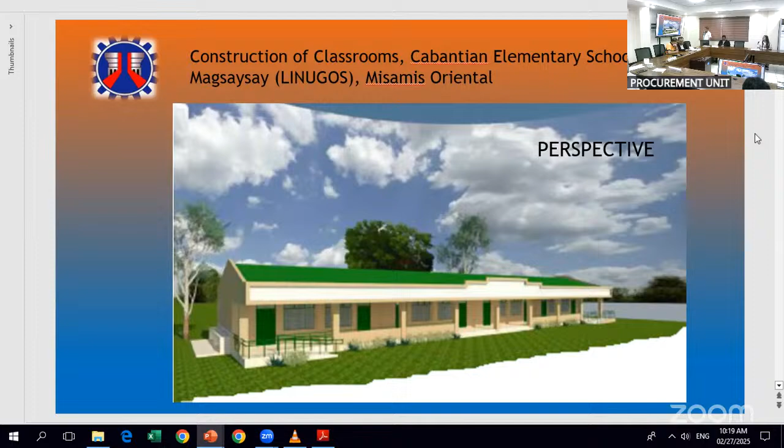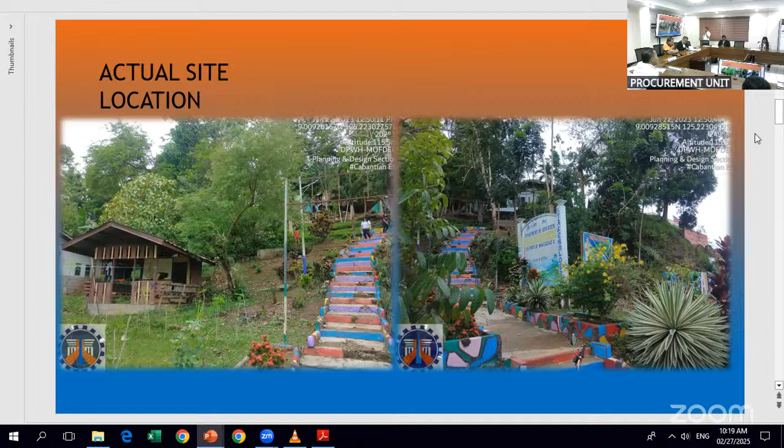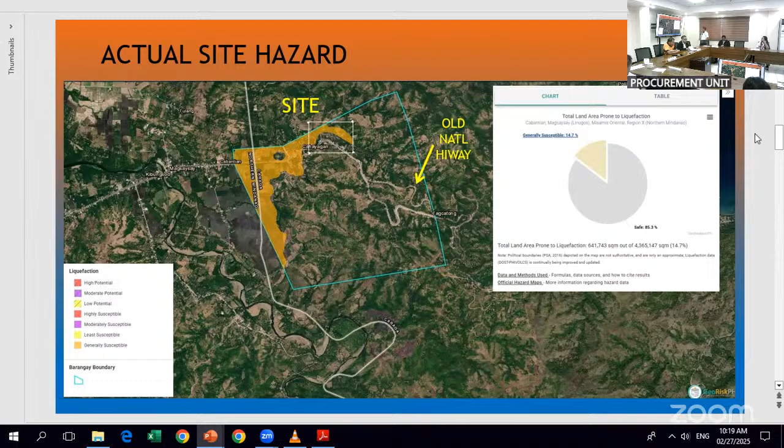So this is our perspective. Our location vicinity is around 57.6 kilometers from our office. This is the actual site location. We want to let everybody know about our site hazard, which is a liquefaction area. As you can see, the yellow on another side is another area. Also for this hazard, we have rain-induced landslide, moderate susceptibility, possible landslide occurrence.

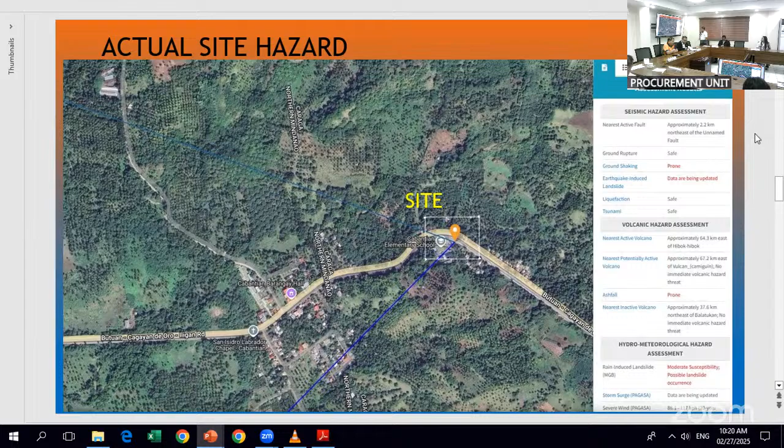Okay, next. This is still the same. So program of works: construction of classrooms with reinforced concrete footing and columns, concrete flooring, masonry works, stainless steel railings, corrugated roofing with steel trusses, rafters, and girts, painting on masonry works, painting on steel works, PWD ramp, concrete pathwalk, windows, tile toilets, sanitary works, plumbing, water lines and sewer line, septic vault, electrical works, signage, slope protection, concrete canal and steps.

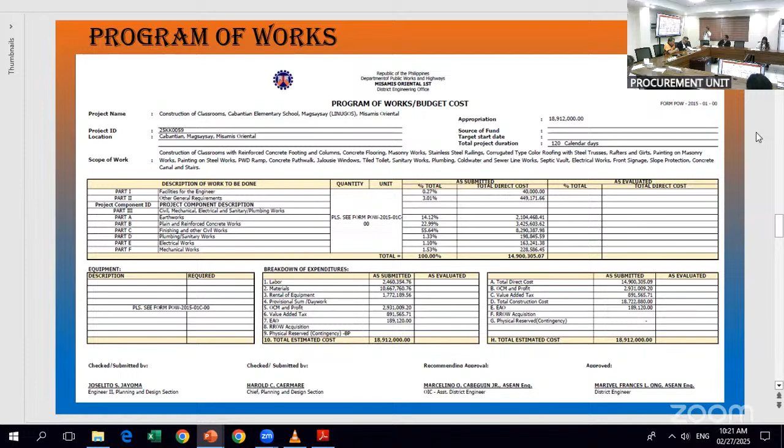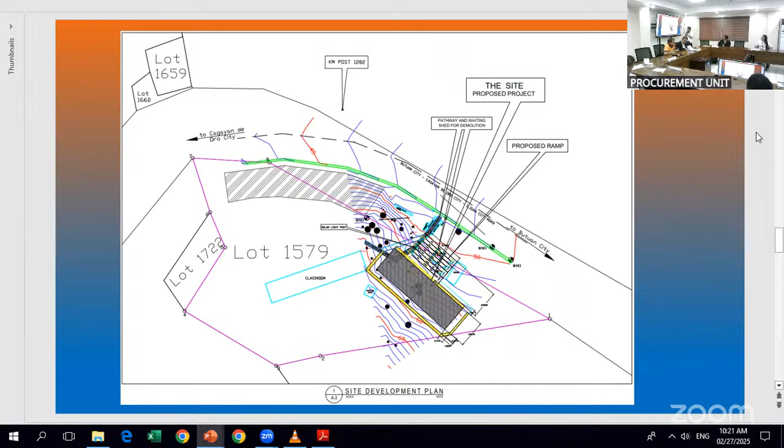So our appropriation is 18,912,000. Total duration is 120 calendar days. So this is our site development plan. On the highway, we have to make this ramp as a DPWH requirement. So this is on the side, and at the same time the ramp.

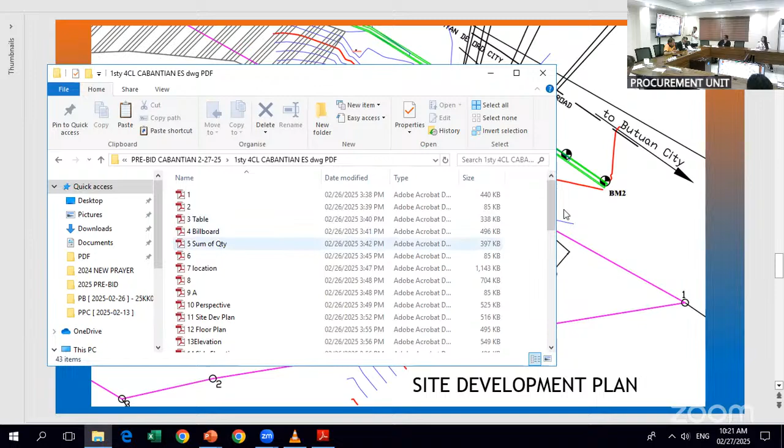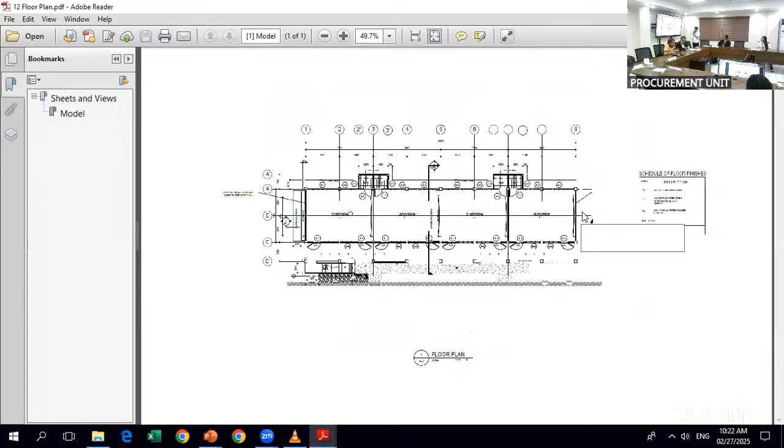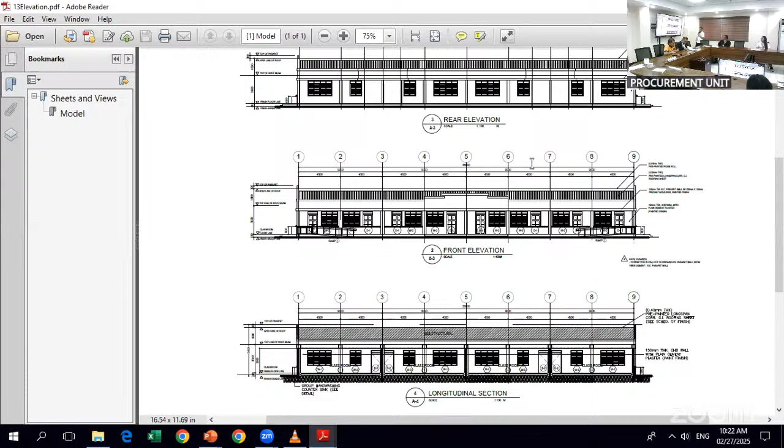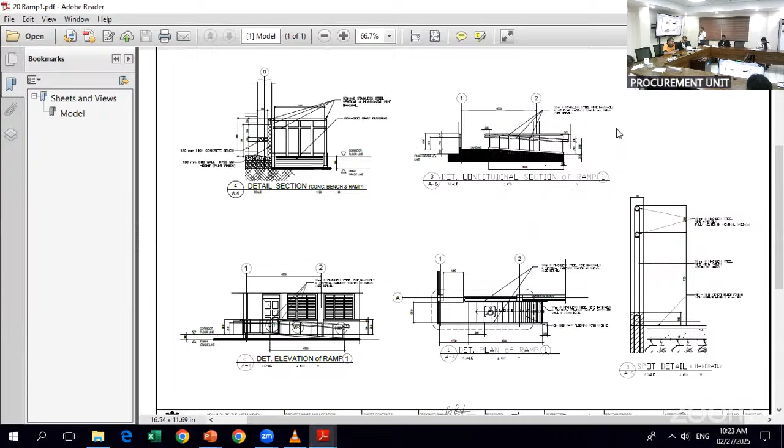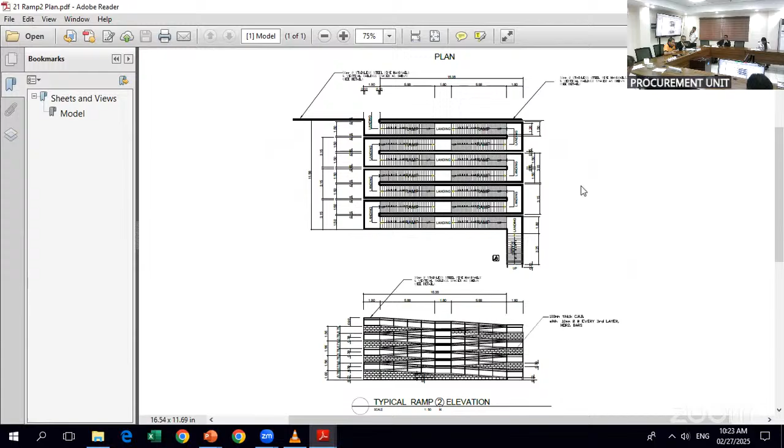Here is ramp 1. We have a standard from the original plan. So this is our ramp 1, on both sides of the building. Next. So again, this is additional work as emphasized earlier, ramp 2. It's quite high from the highway. So to maintain the 1:15 slope, basically 1, 2, 3, 4, 5, 6, 7. Seven of them.

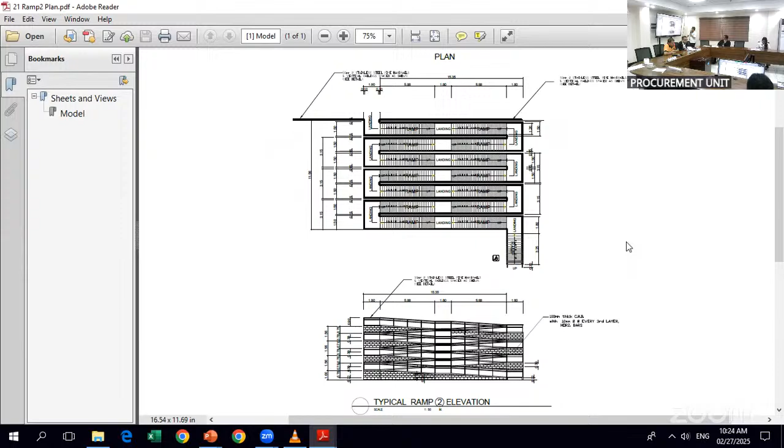So this will be our side elevation section of the ramp. 1:15, so it's quite high. Basically, we use hollow blocks with wall footing, and then on its side. Here it is, on the side. Okay, next.

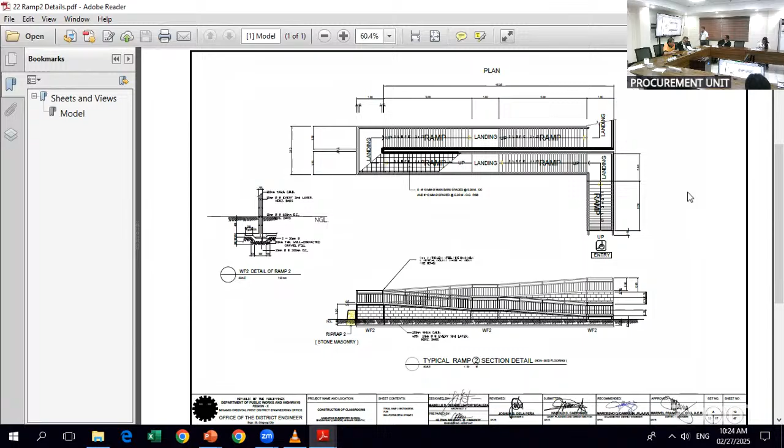So again, on its side we have a regular stair. The one in the original plan is stair 1, so we call this stairs 2. It's in the plan. The total is around 35 steps from the highway. 200 by 300 for the rise and run, so it's just right.

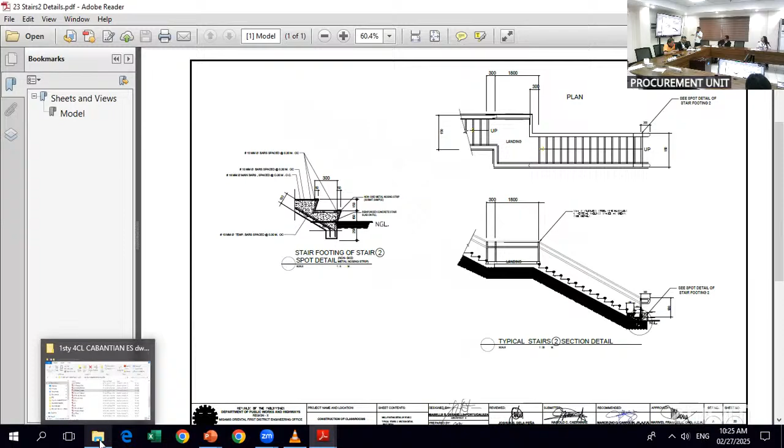So for the whole area, this will be our cross section. We can see here the cutting on the side. Around the building, we established stone masonry or slope protection to protect the building, against landslide and at the same time for the fill area. The ramp on the side is new.

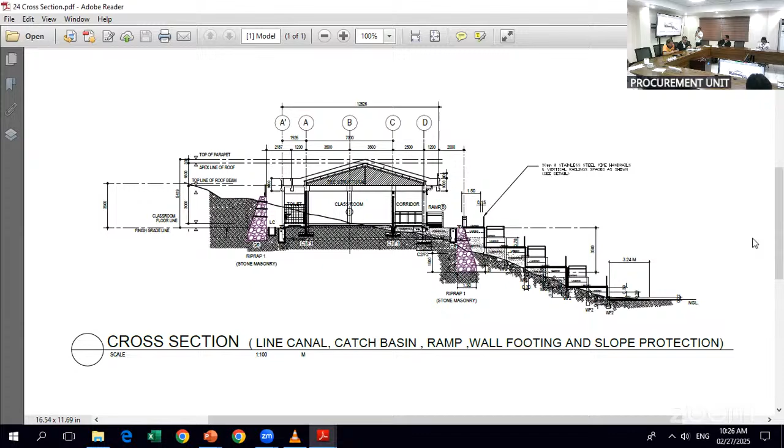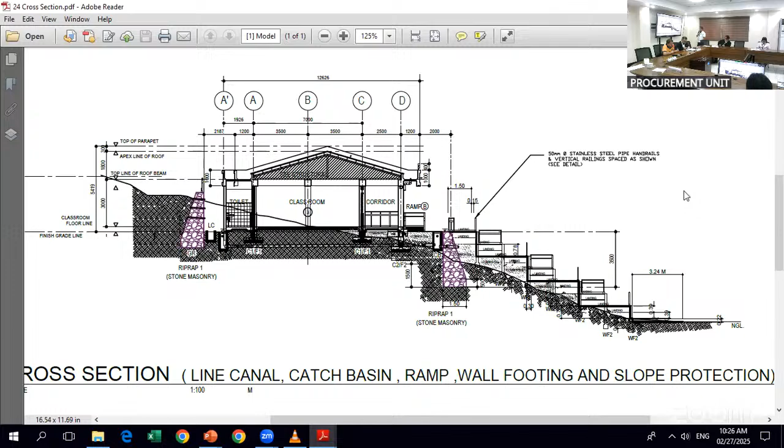So again, we have a lined canal here. This is our lined canal for the gutter runoff. It runs all along to the National Highway, where the water drains out. Okay. So these are our standard details for the stone masonry. We establish weep holes.

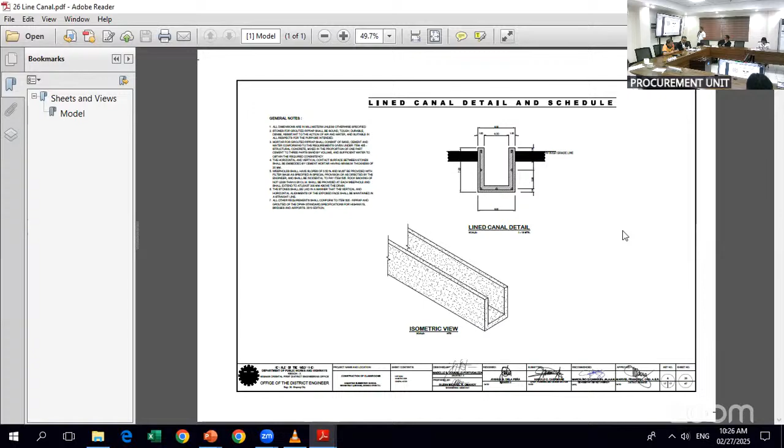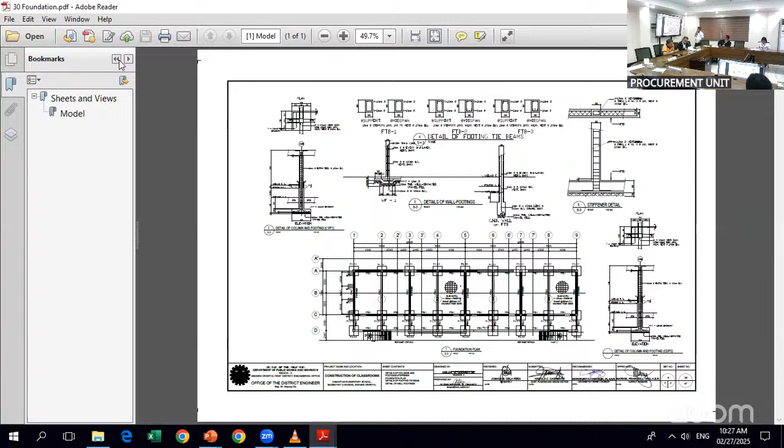So we have also the lined canal. So this is the lined canal around the building and then it goes to the National Highway. Foundation. Okay.

You have blackboard, tank signage, septic tank, electrical works. And we also provided the electrical posts and fire alarm system. Lastly, we have the demolition of existing waiting shed. So that's all. Okay, thank you, Engineer Silito, for the presentation. So, any questions from the BAC members?

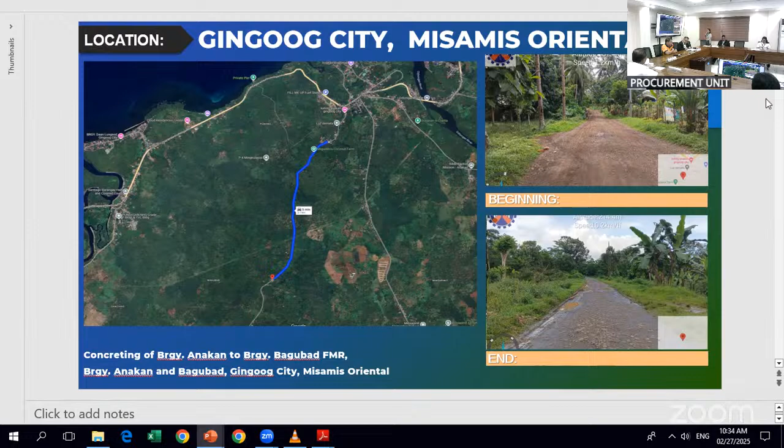So, scope of work, we have concreting of road with carriageway 5 meters width with 0.2 meters thickness. Paved shoulder, 1 meter width with 0.15 meters thickness. We have also construction of retaining wall with wheel guard, rehabilitation of existing PCCP that is 80 meters in length with 0.2 meters thickness. We have also installation of 1 barrel RCPC and we have relocation of electrical poles.

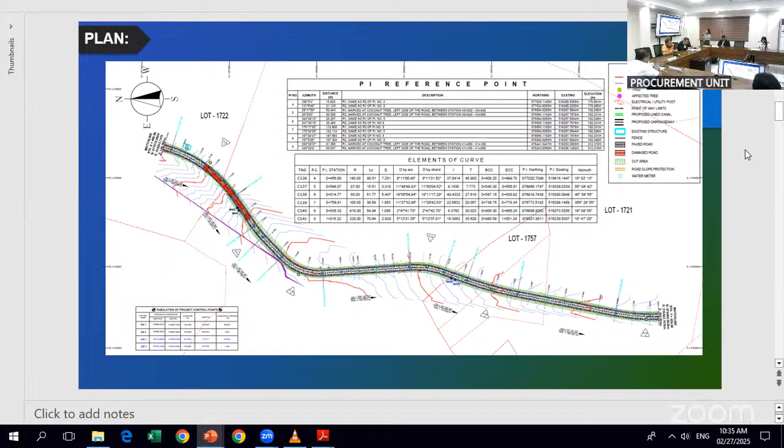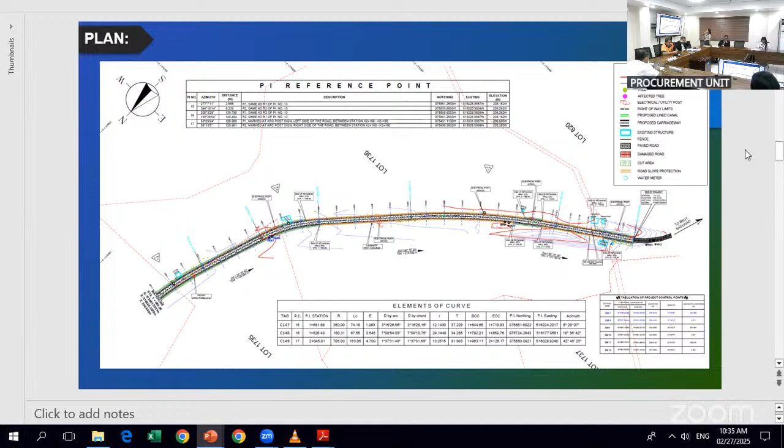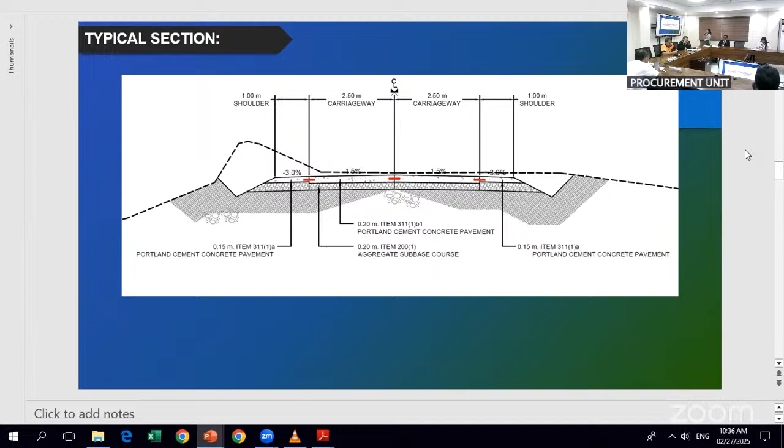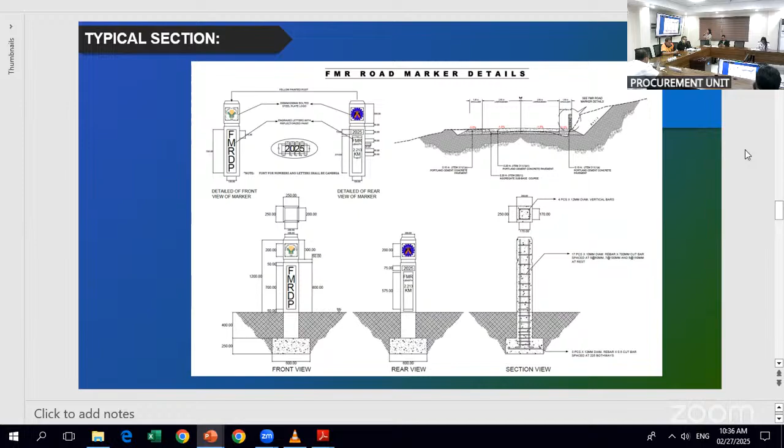Next. So these are the summary of quantities, items included in the project. We have provision of field office for the engineer, project billboard and signboard. We have occupational safety and health program, traffic management, mobilization and demobilization. We have removal and relocation of utilities for our removal and relocation of electrical posts. We have individual removal of trees, removal of actual structures and obstruction for the removal of existing PCCP.

We have surplus common excavation, pipe culvert and drain excavation, embankment from roadways, structure excavation, common soil. We have subgrade preparation, common material, aggregate sub-base course. We have Portland cement concrete pavement, 0.15 thickness, 14 days for our paved shoulder. Portland cement concrete pavement, 0.2 meters thickness for our carriageway. We have reinforcing steel, grade 40, structural concrete, pipe culvert, 910 mm diameter, stone masonry. That would be all.

Thank you, Engineer Sharon. Any questions from the BAC members? None. So from YouTube live viewers? None. So we will proceed for the next project.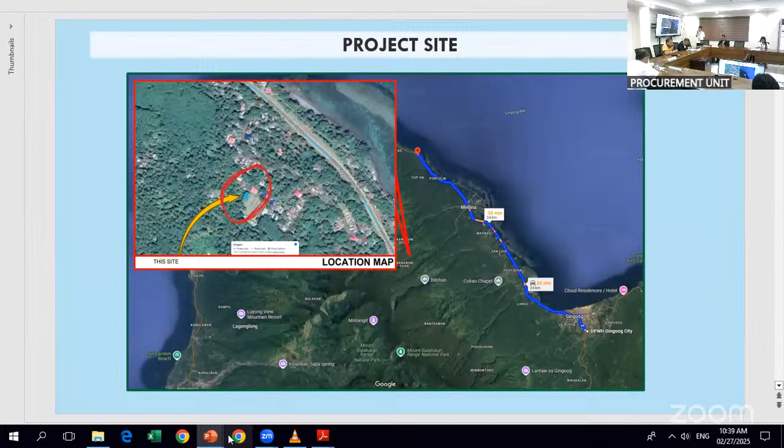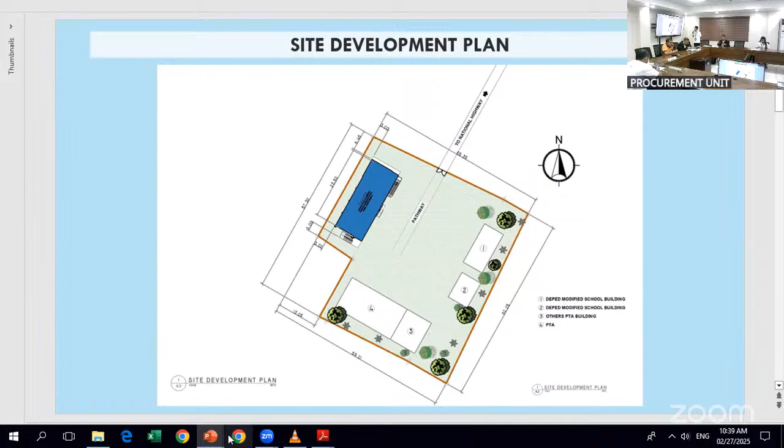For the project scope, the school building includes demolition of existing handwashing area, removal of nine 501 to 750 mm diameter trees, complete structural components, reinforced concrete footing, columns and beams, complete roof trusses and roof sheets, including all roofing accessories, ridge roll, downspout and flashings, complete ceiling with reflective insulation, complete concrete gutter with cement-based liquid and membrane waterproofing,

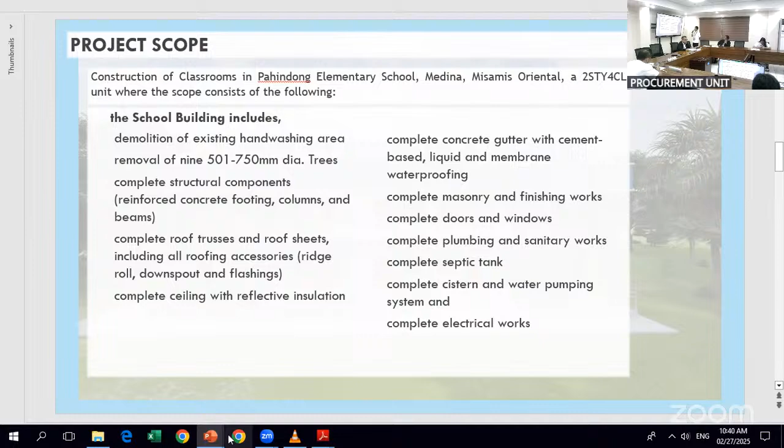complete masonry and finishing works, complete doors and windows, plumbing and sanitary works, septic tank, cistern, water pumping system, and electrical works. Next please. And for summary of quantities, provision of field office for the engineer, rental basis, permits and clearances, project billboard and signboard, occupational safety and health, mobilization and demobilization, general scaffolding and shoring and netting, signages, clearing and grubbing, individual removal of trees, 501 to 750 mm diameter, removal of structure and obstruction, structure excavations, common soil, embankment from

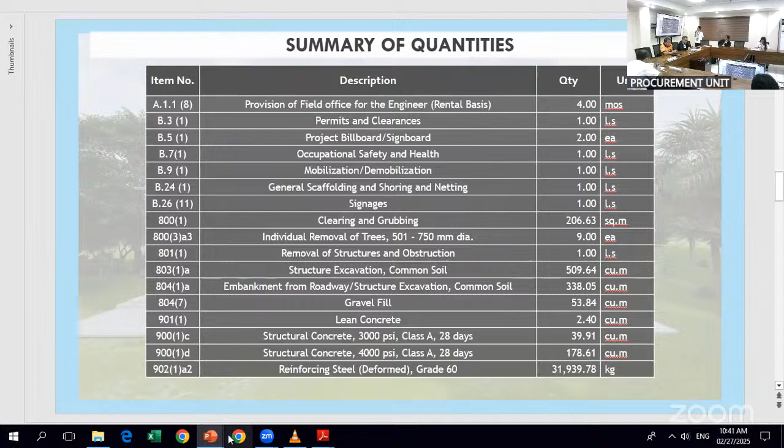roadway structure excavation, common soil, gravel fill, lean concrete, structural concrete, 3,000 PSI class A 28 days, structural concrete 4,000 PSI class A 28 days, reinforcing steel deformed grade 60, reinforcing steel deformed grade 40, formworks and false works, soil poisoning, CHB non-load bearing, including reinforcing steel 100 mm and 150 mm. Doors, flush, wood panel, frames, jambs, sills, head, transoms and mullions. Windows, glass, aluminum glass windows, awning type.

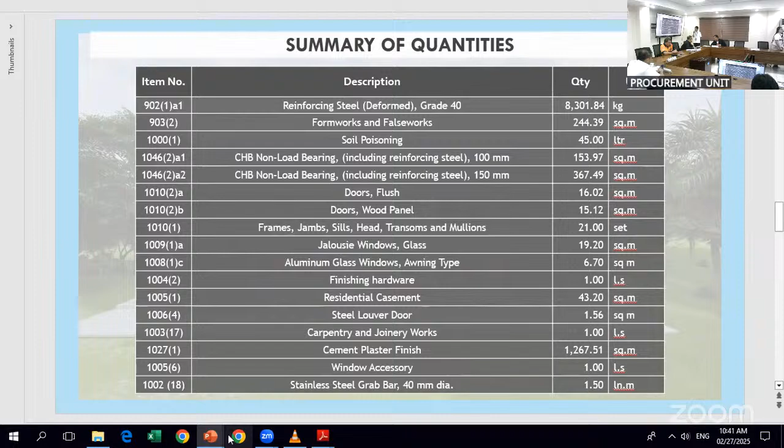Finishing hardware, residential casement, steel louver door, carpentry and joinery works. Cement plaster finish, window accessory, stainless steel grab bar, 40 mm diameter. Molding concrete, ceiling 4.5 mm metal frame, fiber cement board, reflective insulation, glazed tiles and trims, unglazed tiles, textured unglazed tiles, waterproofing, cement-base, waterproofing liquid, built up and preformed membrane, railing, concrete railing, standard, and parapet, stainless steel railing, painting works, masonry or concrete, painting works wood and steel. Pre-painted metal sheets above 0.427 mm corrugated long span. Next, please.

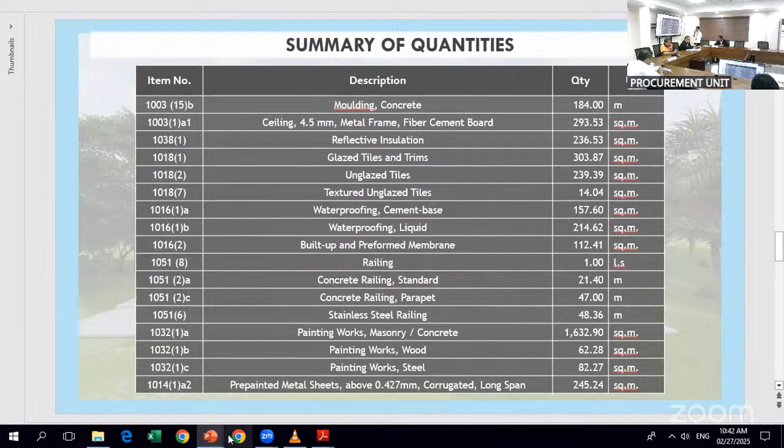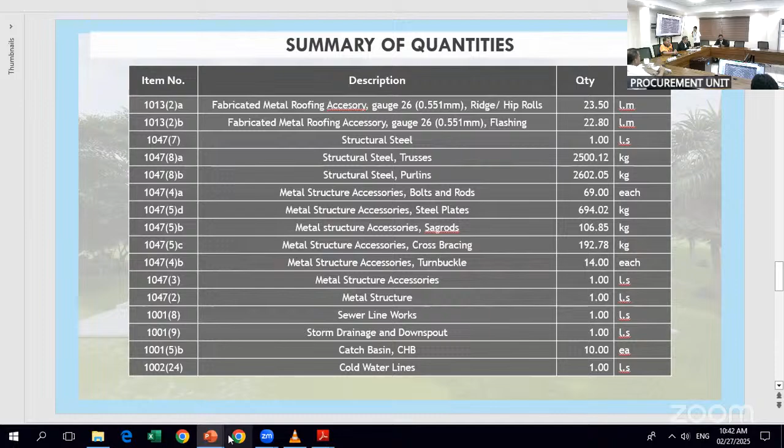Fabricated metal roofing accessory, gauge 26, 0.551 mm, ridge roll. Fabricated metal roofing accessory, gauge 26, flashing, structural steel, purlins, metal structure accessories, bolts and rods, steel plates, sag rods, cross bracing, turnbuckle, metal structure accessories, metal structures, sewer line works, storm drainage and downspout, catch basin, CHB, cold water lines, plumbing fixtures, septic vault, cistern, conduits, boxes and fittings, wire and wiring devices, panel board with main and branch breaker, lighting fixtures and lamps, water pumping system, and fire alarm system.

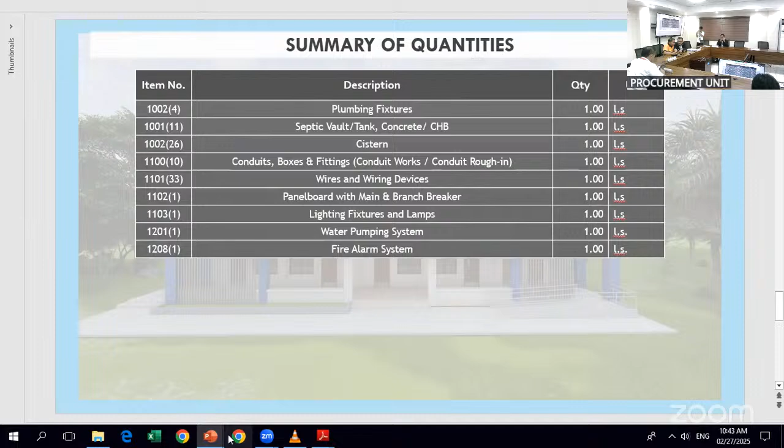Any question? Thank you, Engineer Clark. Any questions from the members? So from YouTube live viewers, and so we'll proceed for the next project.

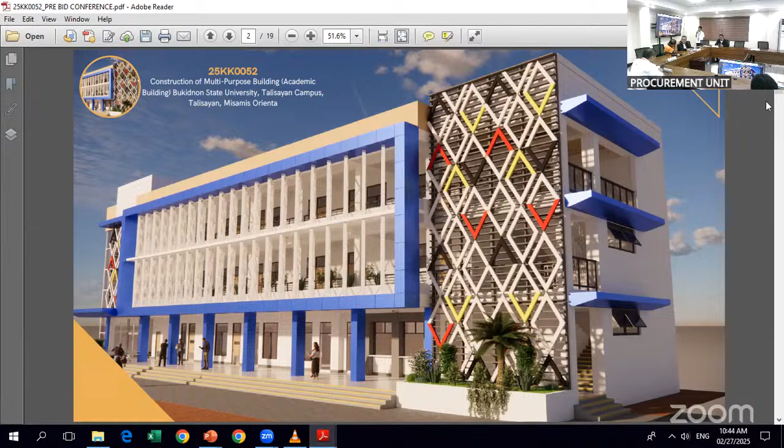So next, I'll now present another project. The project ID 25KK0052, construction of multi-purpose building, academic building, Bukidnon State University, Talisayan campus, Talisayan, Misamis Oriental. This is our perspective. Next, please. And as you can see, this is our corridor. Next, please. This is the project site. It is behind the existing building. Okay. Next, please.

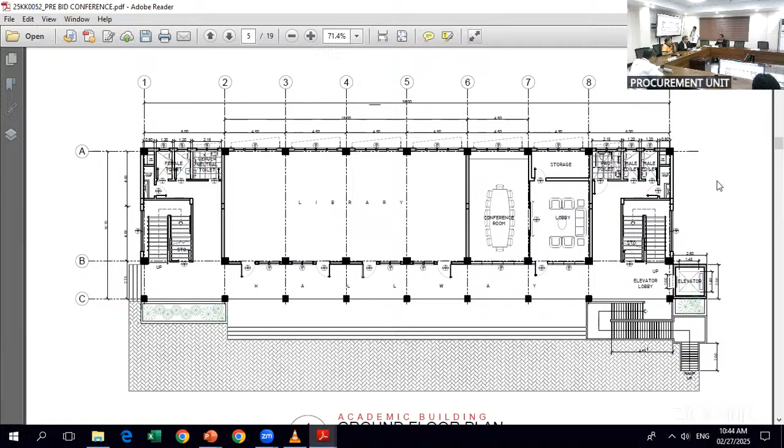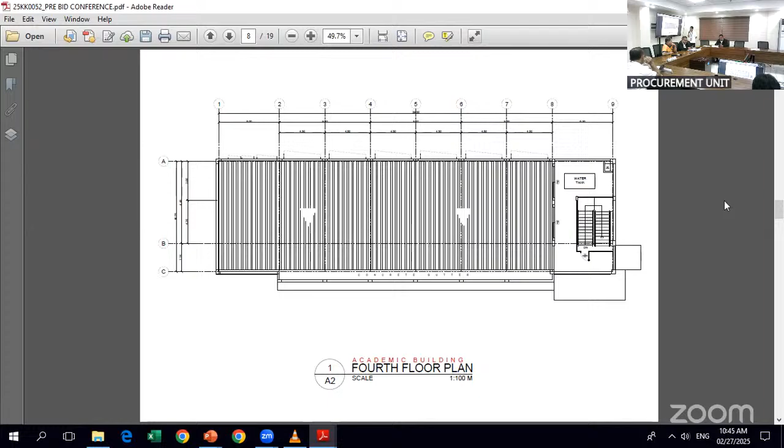This is our ground floor plan. We have a library which occupies 2 classrooms, then conference room, as well as storage and lobby. Next, please. And this is the second floor plan. We have here 3 classrooms. Next, please. And then our third floor plan, we have 2 classrooms and 1 science laboratory. And the fourth floor plan. Next, please. So this is the front elevation.

Our rear elevation. And the right side and left side elevation. For the project details, appropriation 50 million, ABC 49,500,000, and duration of 280 calendar days.

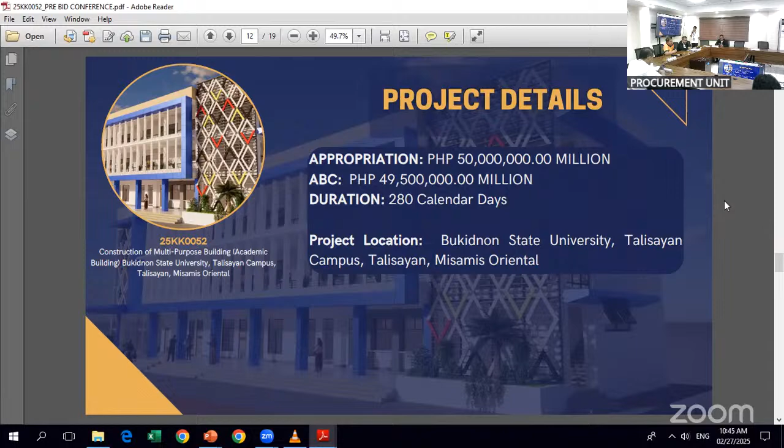Construction of three-story school building with 5 classrooms, 1 science laboratory, and a library. The scope includes the following: earthworks, including excavation, complete structural components, footings, columns, beams, on-grade and suspended slabs, and steel frames for the provision of elevator, complete CHB, interior and exterior partitions with plaster and painted finish,

complete windows and doors, including accessories, floor finish to tile, glazed, and unglazed, and epoxy coated finish, complete roofing works. Complete plumbing works, including septic vault, cistern, plumbing fixtures and piping for sewer, drainage and downspout and cold water lines, complete mechanical works, including fire alarm system, ventilating system, water pumping system, automatic fire sprinkler system, and the provision of electric elevator. And electrical works, excluding generator set.

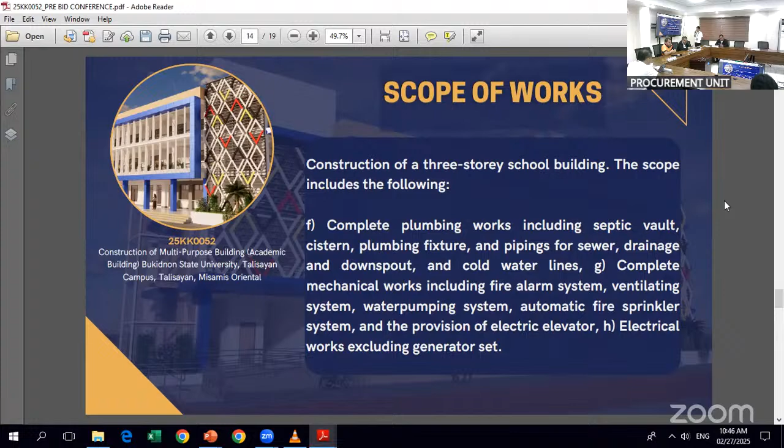and grade 60, structural steel, furnished, grade 36, structural steel, erected, grade 36, formworks and falseworks, soil poisoning, CHB non-load bearing, including reinforcing steel 150 and 100, painting works, masonry, concrete, wood, steel, then glazed tiles and trims, and unglazed tiles, textured and glazed tiles, stainless steel grab bar, ceiling, metal frame, fiber cement board, ceiling, metal frame, gypsum board, wall, metal frame, fiber cement board, finishing hardware, aluminum glass windows, sliding type, awning type, and fixed type, jalousie

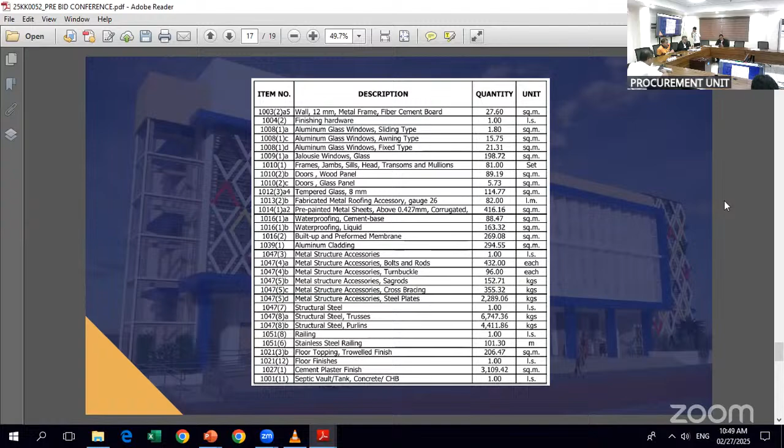windows, glass frame, jamb sills, head transoms, and mullions, doors, wood panel, and glass panel, tempered glass, fabricated metal roofing accessory, gauge 26, pre-painted metal sheets, corrugated, and then waterproofing cement base, waterproofing liquid, built up and preformed membrane, aluminum cladding, metal structure accessories, bolts and rods, turnbuckle, sag rods, cross bracing, and steel plates, structural steel trusses and purlins, railings, stainless steel railing, floor topping, floor finishes, cement plaster finish, septic vault tank, concrete,

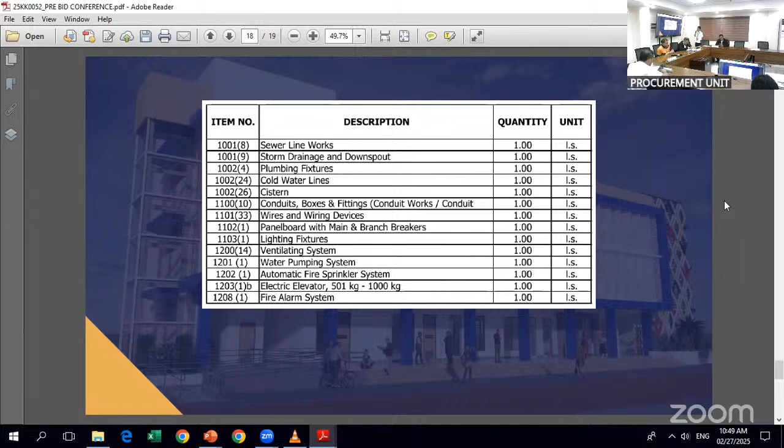sewer line works, storm drainage and downspout, plumbing fixtures, cold water lines, cistern, conduits, boxes and fittings, wires and wiring devices, panel board with main and branch breakers, lighting fixtures, ventilating system, water pumping system, automatic fire sprinkler system, electric elevator, 501 kilogram to 1,000 kilogram. Then lastly is the fire alarm system. That's all. Thank you.

Okay, so do you have questions from the board members? None, so YouTube live viewers, none, so we'll proceed for the next project. Thank you, Engineer Clark.

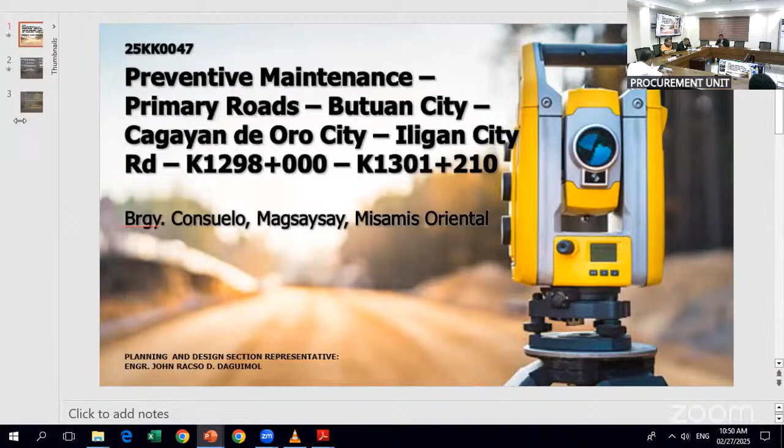Hello, good morning, everyone. So last project, 25KK0047, preventive maintenance, primary road, Butuan City-Cagayan de Oro City-Iligan City Road, kilometer 1298+000 to kilometer 1301+210. With the budget for the contract, 144,750,000, with a length of 3,217 linear meters, contract duration of 175 calendar days. Location is Magsaysay, Misamis Oriental.

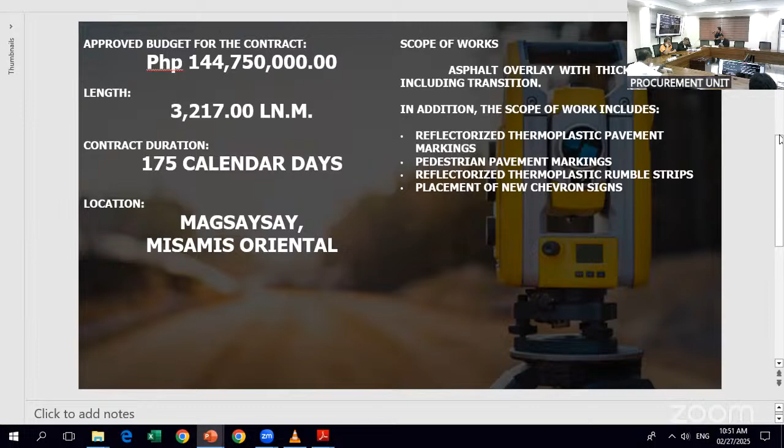For the scope of works, asphalt overlay with thickness of 50 mm, including transition. In addition, the scope of works includes reflectorized thermoplastic pavement markings, pedestrian pavement markings, reflectorized thermoplastic rumble strips, and placement of new chevron signs. So it is provision of field office for the engineer, 5.83 months. Billboard is 2 each. Occupational safety and health, 1 lump sum. Traffic management, 1 lump sum. Mobilization, demobilization, 1 lump sum.

Emulsified asphalt, 46,660.50 square meters. Bituminous concrete surface wearing course, hot plant, 50 mm, 46,660.5 square meters. Regulatory signs for pedestrian crossing, 6 each. Regulatory signs for school children crossing, 4 each. Warning signs for slow down, 3 each. Traffic instruction signs, reduce speed, 3 each. Hazard markers or chevron sign, 24 each.

Reflectorized thermoplastic pavement markings white, 1,085.13 square meters. Concrete joint sealant, hot-poured elastic type, 6,807.83 kilograms. And reflectorized thermoplastic rumble strips, 60 square meters. Okay, so thank you, Engineer John Racso. So do we have questions from board members? None from the YouTube live viewers.

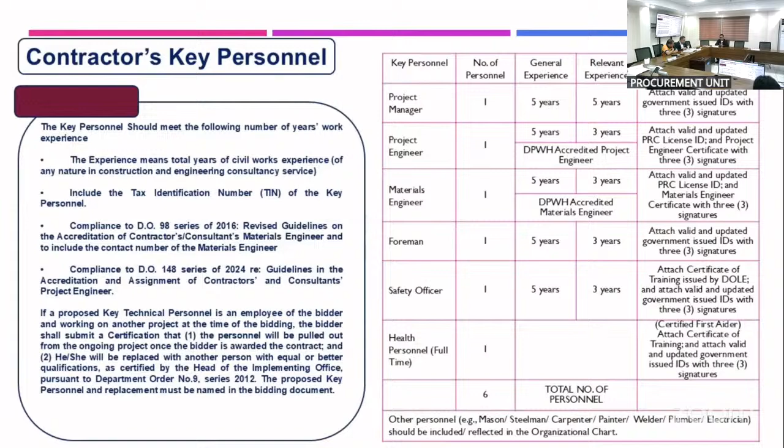Another personnel is one safety officer with 5 years of general experience and 3 years of relevant experience, with a certificate of training and a valid and updated government ID with relevant experience. The last is one full-time health personnel, with the certificate of training and a valid and updated government ID, of 3 years. All in all, there should be 6 total, with other personnel such as the mason, steelman, carpenter, painter, welder, plumber, or electrician to be included or reflected in the organizational chart.

Contractor's minimum equipment requirements. The contractor is required to provide proofs of ownership and other supporting documents for equipment owned, lease agreements for equipment, and or purchase agreements supported by a certificate of availability from the equipment lessor or vendor for the duration of the project. Proofs of ownership and other supporting documents must specify and indicate the model, owner, capacity, performance, or size, plate number, car number, or body number, chassis serial number, engine serial number, specification and condition.

Contractor's minimum materials testing: please refer to DO number 11, series of 2017 for minimum materials testing. This requires the submission of the materials testing equipment as stated in clause 5.6, 2.8, and 4.c. Project requirements using form DPWH INFR 15, list of contractor's major construction equipment, to be assigned to the contract, supported by certificates of availability.

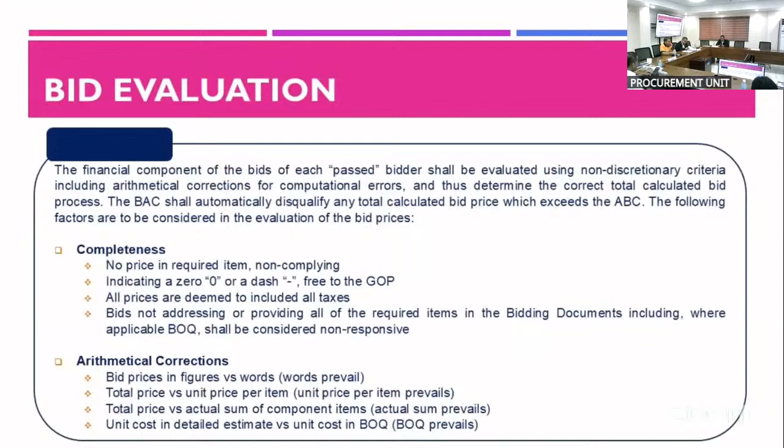BOQ prevails. Post qualification. Verification of legal requirements: licenses, certificates, permits, non-inclusion in blacklist. Verification of technical requirements: key personnel, where minimum work experience requirements should be satisfied. Availability and commitment of major construction equipment and materials for laboratory equipment. Performance in ongoing government and private contracts.

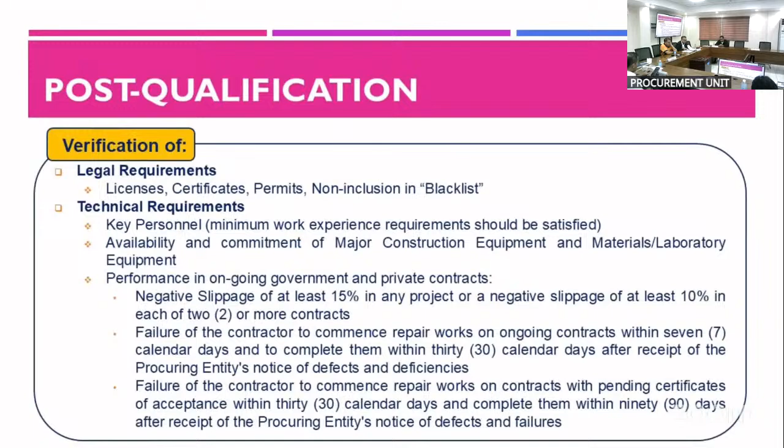Negative slippage of at least 15% in any project, or a negative slippage of at least 10% in each of 2 or more contracts. Failure to commence repair works on ongoing contracts within 7 calendar days and to complete them within 30 calendar days after receipt of the procuring entity's notice of defects and deficiencies. Failure of the contractor to commence repair works on contracts with pending certificates of acceptance within 30 calendar days and complete them within 90 days after receipt of the procuring entity's notice of defects and failures.

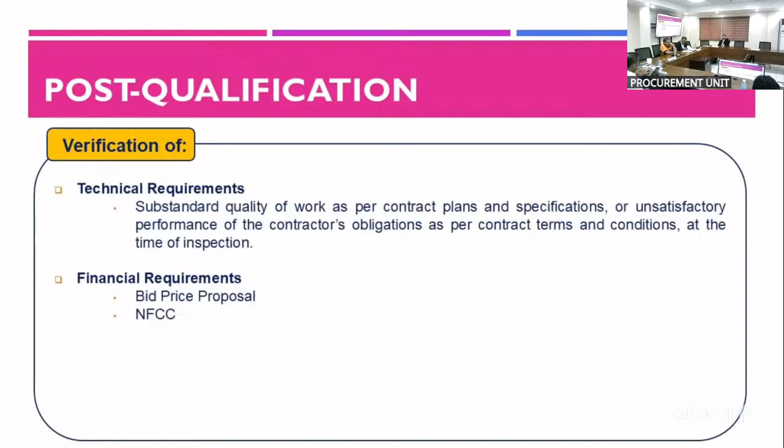Verification of technical requirements: substandard quality of work as per contract plans and specifications, or unsatisfactory performance of contractors' obligations as per contract terms and conditions at the time of inspection. Verification of financial requirements: bid price proposal and NFCC.

Contract award. The contract shall be awarded to the bidder whose bid has been determined to be the lowest calculated and responsive bid, or LCRB, as a result of the detailed evaluation and post-qualification conducted. The successful bidder shall be notified through the issuance of notice of award within the bid validity period and must be confirmed by the successful bidder in writing within 10 days upon receipt thereof, in accordance with section 37.2.2 of the 2016 revised IRR of RA 9184.

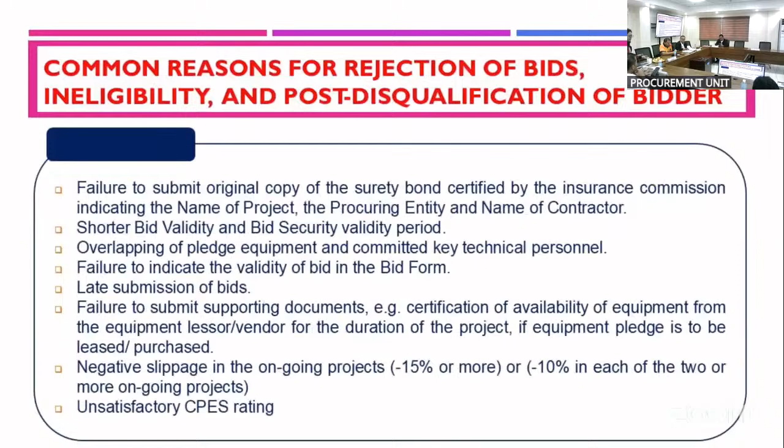6. Failure to submit supporting documents, such as the certification of availability of equipment with the equipment lessor or vendor for the duration of the contract, if equipment pledged is leased. 7. Negative slippage in the ongoing projects, negative 15% or more, or negative 10% in each of 2 or more ongoing projects. 8. Unsatisfactory CPES rating. 9. Incomplete pages of bid documents. 10. Authority of the signatory to sign on behalf of the bidder.

Single proprietor: signatory should be the owner or proprietor only. Corporation or cooperative: board secretary certificate and board resolution. Joint venture: resolution and agreement. Partnership: as indicated in the articles of the partnership. That is all.

Strike policy for contracts for infrastructure works, goods, and consulting services as per Department Order number 17 series of 2015. Section 69.1. In addition to the provisions of rules 21 and 22 of this IRR, the HoPE, subject to the authority delegated to the BAC, if any, shall impose on bidders or prospective bidders the administrative penalty of suspension for 1 year for the first offense and suspension of 2 years for the second offense from participating in the competitive bidding process, as well as disqualification from further participating in the competitive bidding being undertaken by the procuring entity concerned, where applicable, for the following violations.

All other acts that tend to defeat the purpose of competitive bidding, such as habitually withdrawing from bidding, submitting late bids, or patently insufficient bids for at least 3 times within a year except for valid reasons. Strike violations: 1. A bidder that had purchased bidding documents but subsequently withdrew from the bidding or submitted a letter of non-participation or did not submit a bid without a valid cause as determined by the bids and awards committee concerned. A bidder submitting insufficient, defective documents such as insufficient bid securities and other deficiencies.

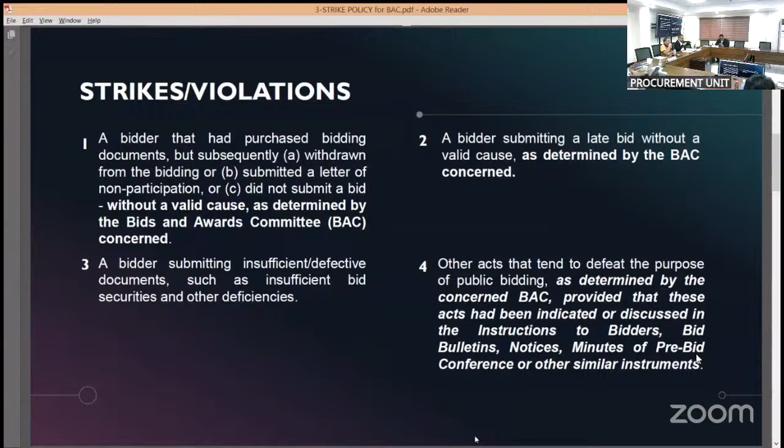Strikes violations. A bidder that had purchased bidding documents but subsequently withdrew from the bidding, or submitted a letter of non-participation, or did not submit a bid without a valid cause as determined by the bids and awards committee concerned. Valid reasons: upon computation, its price bid was determined to be above the ABC, or goods to be supplied are no longer available in the market. A bidder submitting a late bid without a valid cause as determined by the BAC concerned. Valid reason: due to force majeure and quarantine restrictions.

A bidder submitting insufficient and defective documents, such as insufficient bid securities. Number 1, bid security not in the name of the bidder. Number 2, insufficient amount and validity period. Number 3, not issued in the name of the procuring entity. Submission of not valid PhilGEPS. The failure of a prospective bidder to submit his PhilGEPS certificate with the current and updated Class A eligibility documents, for example, legal and financial documents. Valid reason not accepted.

Failure to submit mandatory forms: price schedule, bid form, notarized bid securing declaration, notarized omnibus sworn statement. Other required forms for bid security aside from the bid securing declaration. Statement of the bidder of all its ongoing government and private contracts, including contracts awarded but not yet started. Statement of the bidder's SLCC similar to the contract to be bid. Owner's certificate of acceptance or CPES rating accompanying statement of the bidder's SLCC. Bidder's computation of NFCC or committed line of credit for goods.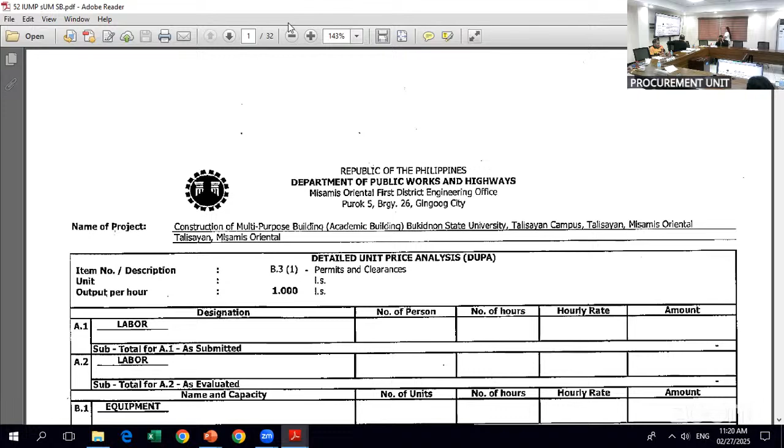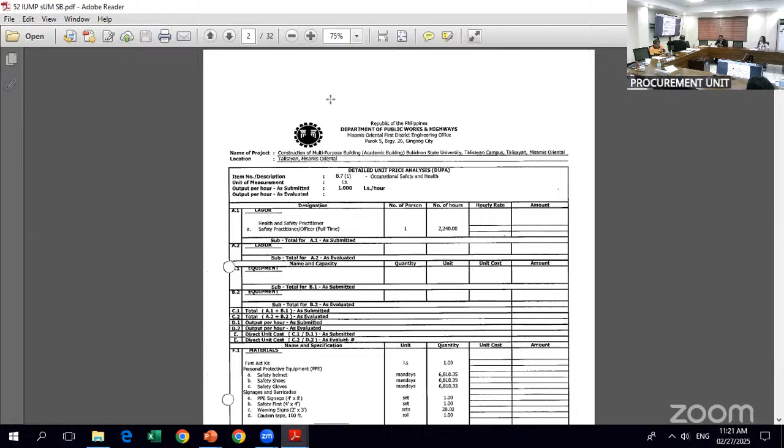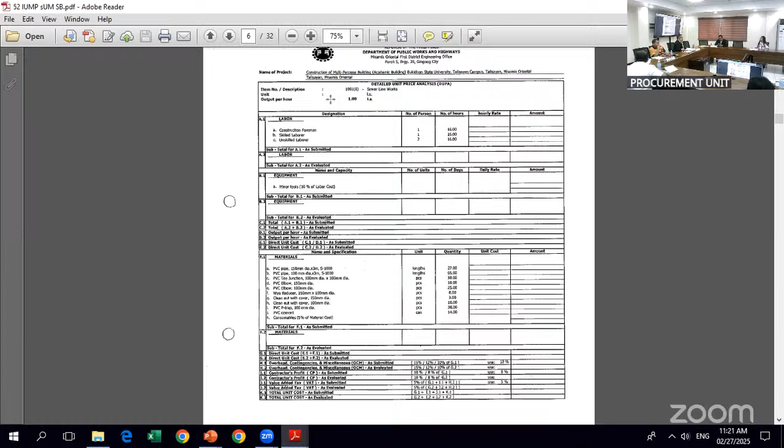For additional information for the interested bidders, we attach in the bid documents the detailed unit price of the lump sum unit only, so they can use this as the detailed backup computation for the financial proposal. So these documents must be included in the financial proposal. All of these are attached in the documents. Thank you.

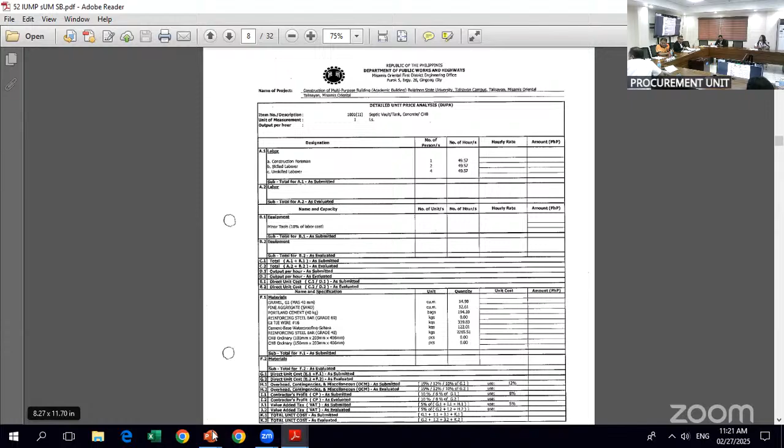And, respective bidders, these are the scheduled procurement activities for the presented projects. For issuance of the bidding documents, deadline will be on March 12, 2025 until 8:30 a.m. And the deadline of submission of bidding documents will be on March 12, 2025 until 10 a.m. And the opening of bids will be on March 12, 2025 at 10 a.m., immediately after the submission of bids.

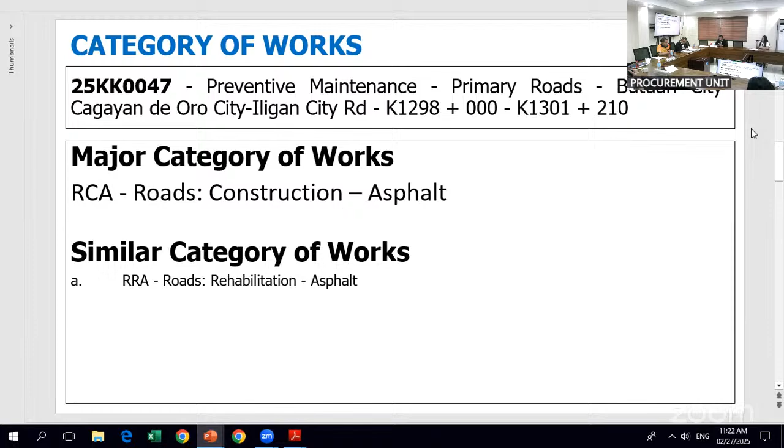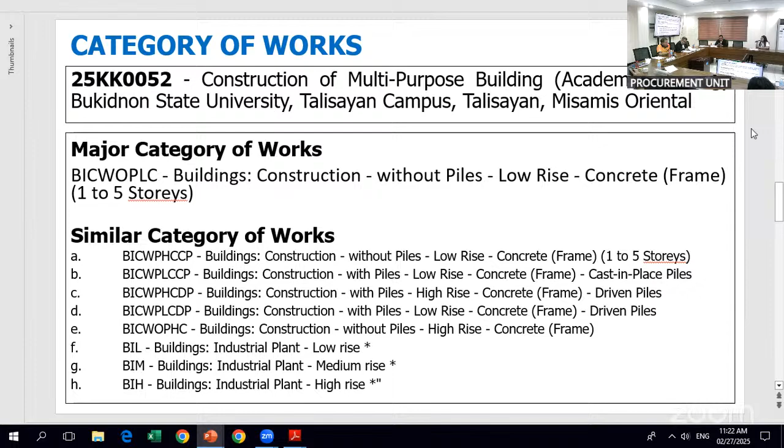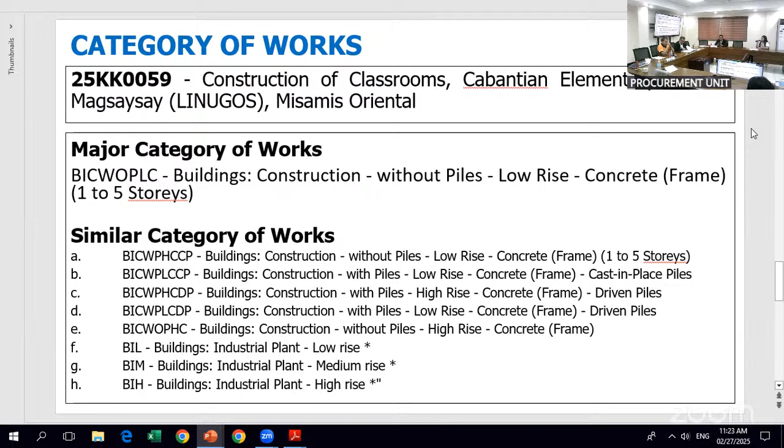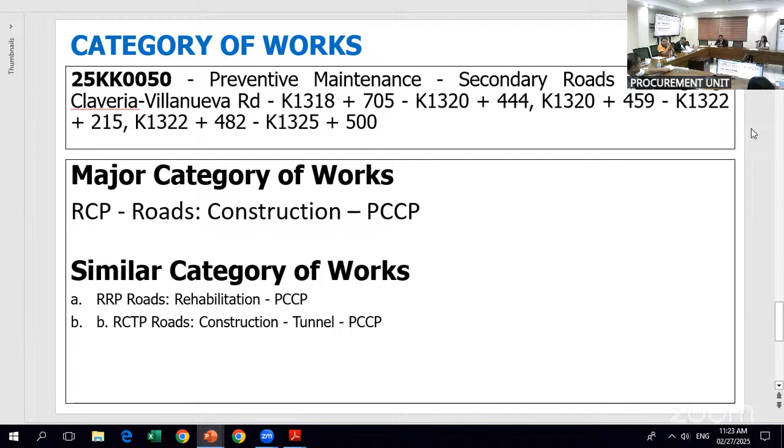So any questions from the YouTube live viewers? None. So any motion for the adjournment of this morning's pre-bid conference for civil works dated February 27, 2025? It has been moved and seconded for the adjournment of this pre-bid conference for civil works dated February 27, 2025. So now I will declare this pre-bid conference for civil works adjourned.